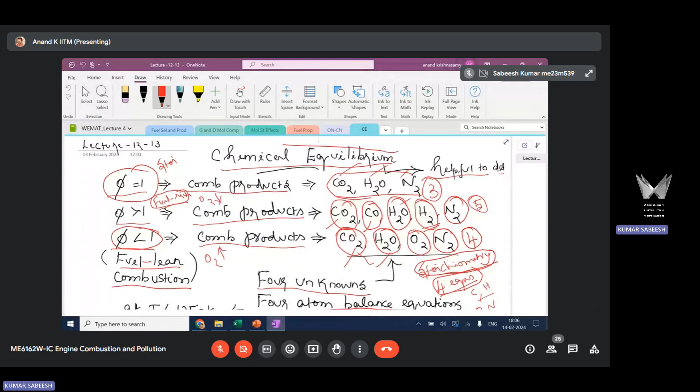So this is where I stop. This concept, chemical equilibrium, is primarily applied to determine the composition of the combustion product.

As I said, this combustion product composition is a strong function of two parameters: one is fuel-air equivalence ratio Phi, the other is temperature. We already discussed how this equivalence ratio affects the combustion product. We have considered three possible cases.

One is the stoichiometric case, where the major combustion products occur. I use the word 'major' because these are the major species even in actual IC engine combustion; there are several minor products which we are ignoring here. Actual product composition is much more complex and involves several other species, but generally these three are the major species. That's why with this simplified principle, we find only the major species information. Under stoichiometric condition, you have only three major species: CO2, H2O, and N2.

With phi greater than 1, that's fuel-rich condition. When you combust under fuel-rich condition, you will have 5 product species. Apart from CO2, H2O, and N2, CO and H2 will also be there. CO and H2 are the major products of incomplete combustion, because of oxygen deficiency, carbon burns to CO and hydrogen in the fuel comes out as it is. These are other species apart from the three major ones when you go with fuel-rich combustion.

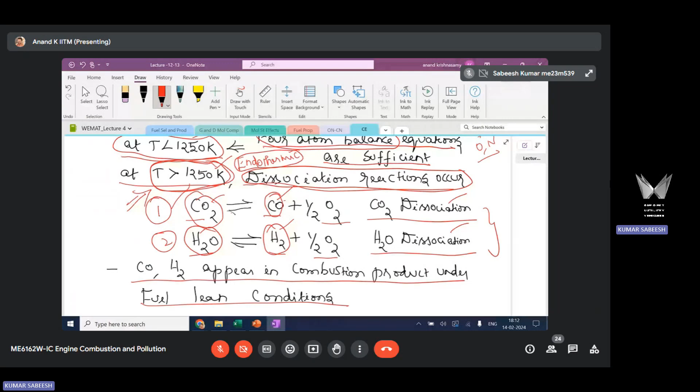These reactions happen at high temperature, well above 1250 Kelvin, where these molecules disintegrate and form additional species. So you will have CO and H2 present in the combustion product, although you are combusting under fuel lean condition.

You know what fuel lean is. When I say fuel lean condition, it's an oxygen rich condition. Even with more oxygen, you have CO and H2 present in the combustion product. We have already considered that CO and H2 are products of incomplete combustion, isn't it?

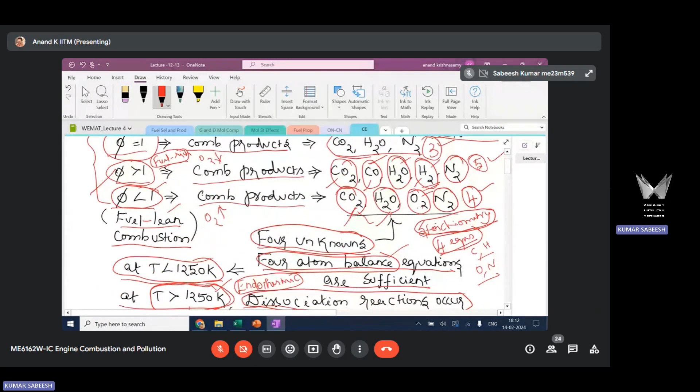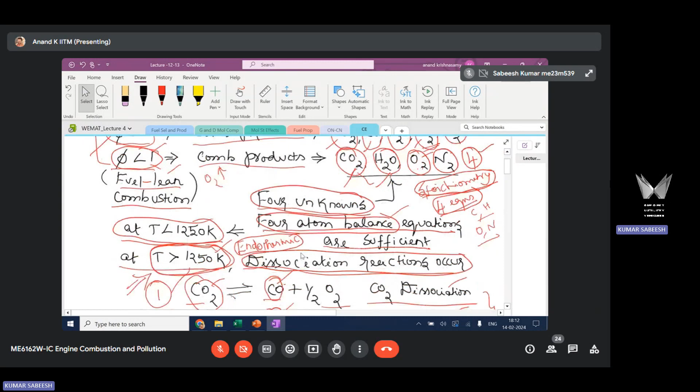Incomplete combustion happens when there is a deficiency of oxygen. With deficiency of oxygen, incomplete combustion happens and CO and H2 appear in the product. But now what is happening? Even with fuel lean or oxygen rich condition, I have this incomplete combustion product CO and H2 present along with the other major species.

This happens not because of oxygen deficiency, but because of dissociation reaction of stable species, which we categorize as endothermic reaction. Stable molecules disintegrate and form additional species. Since CO2 and H2O are present in major amount in the engine exhaust, they can very well form CO and H2 by undergoing dissociation reaction by absorbing thermal energy.

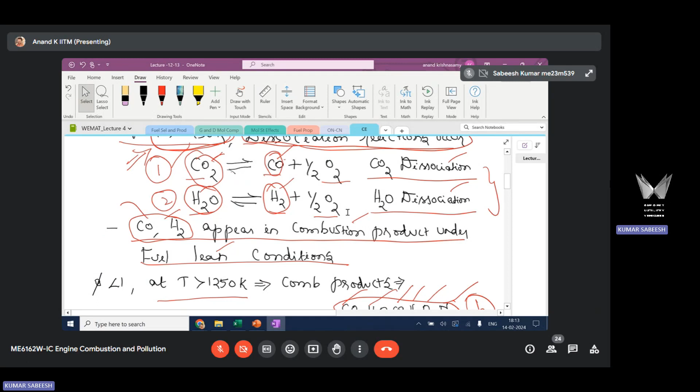The point to note here is when phi is less than 1, that is fuel lean or oxygen rich, at higher temperature T greater than 1250 Kelvin - this is a threshold value determined based on experiments - people observed that at this higher temperature, you are going to have dissociation reaction from major species present in the exhaust, which are CO2 and H2O.

Now, under this condition of phi and T, you could count the number of major species present in the engine exhaust: CO2, H2O, CO, H2, O2, and N2. You have 6 unknowns. Now I need to find the number of moles of all these 6 species present in major amount in the engine exhaust.

In order to get these 6 species, you cannot get the number of mole information only by stoichiometric principle, because we know that we can form at most only 4 equations from atom balance by applying stoichiometric principle. But how many unknowns do I have? I have 6 unknowns.

So stoichiometric principle alone is not sufficient to find the product composition under these conditions. Even with fuel lean, when temperatures are more, I am going to get more additional major species. So stoichiometric principle has a limitation. That is what is highlighted here. Now, how do I find the product composition?

To find the product composition, I need to apply chemical equilibrium concept. With chemical equilibrium concept, you can form additional equations, and by using those equations, apart from the 4 atom balance equations, you will be able to find the product composition. This is the usefulness of this chemical equilibrium concept.

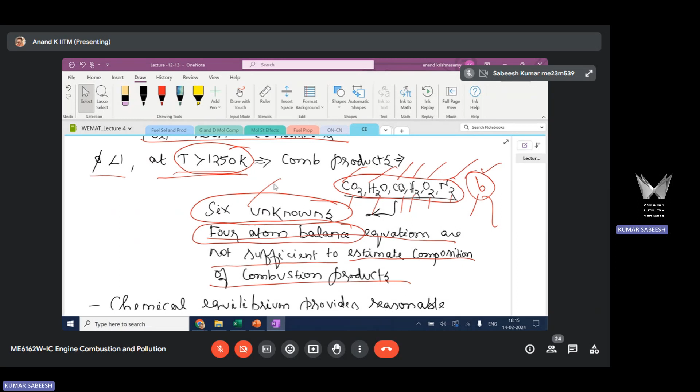Having understood the background information about how useful this concept is, now we are delving deep and we are going to discuss what this chemical equilibrium is, and how I can form additional equations by applying this concept.

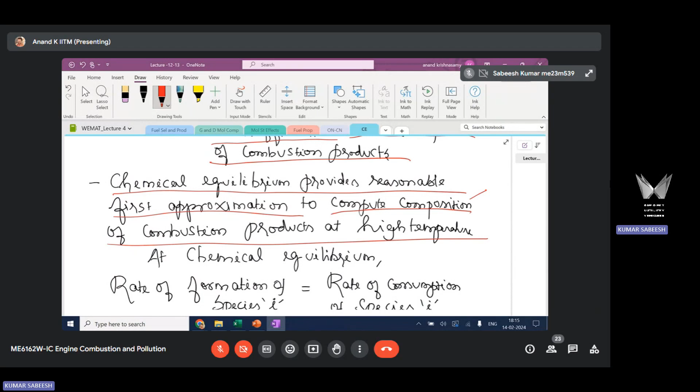Chemical equilibrium provides a reasonable first approximation to compute composition of combustion products at high temperature. When temperatures are high, dissociation reactions are going to happen, and more species are going to form in the combustion product. So we need to apply this concept - there is no other way to find the product composition.

Now what is this chemical equilibrium? We know that when a chemically reacting system is under chemical equilibrium, the rate of formation of any species, say species i, is equal to the rate of consumption of that same species. There is a formation, there is a consumption, and at the equilibrium condition, the rate of formation equals the rate of consumption. So what it means is there is no net change of species i.

Under equilibrium condition, there is no net change of species i, because the rate of formation of that species is equal to the rate of consumption of that species. So this is a qualitative or physical meaning of what an equilibrium condition is.

Now this is only qualitative understanding. This is not enough. We need to give some equations and establish the conditions for chemical equilibrium so that we can get the product composition. That is our focus.

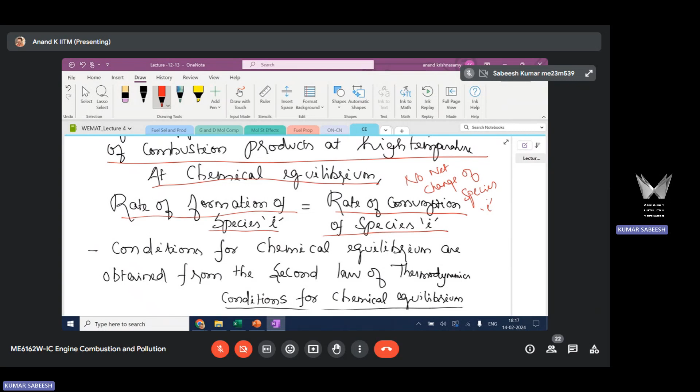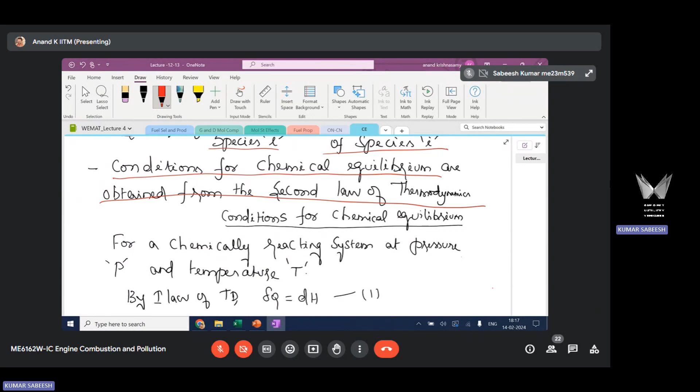Now moving ahead, we are going to discuss the conditions for chemical equilibrium. To establish these conditions, we are going to apply the first and second law of thermodynamics. This is where the principles of thermodynamics come into the picture. We are going to see how we can establish conditions for chemical equilibrium in order to get a quantitative estimate of product composition, and from that we will see how we can form additional equations.

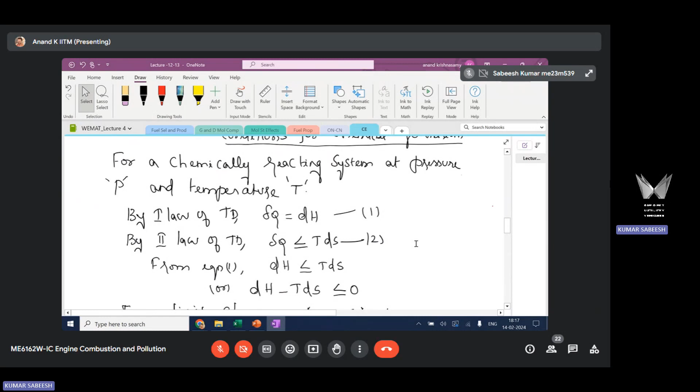So for applying the thermodynamic principle, it's a steady state approximation. We will consider a steady state and apply this principle so as to arrive at the condition. This is what we are doing here.

Now we are considering a chemically reacting system. When I say system, it's a fixed mass of matter. When I say chemically reacting system, the fixed mass of matter includes fuel and air, which can react chemically, which can undergo chemical reaction. This is what I mean by a chemically reacting system.

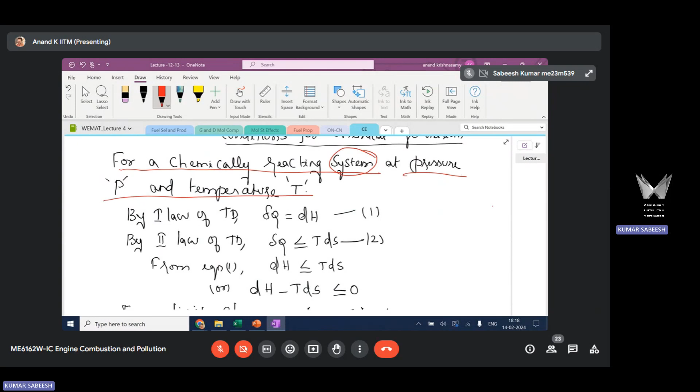Now let us consider a chemically reacting system at a pressure P and temperature T, because I'm going to apply the thermodynamic principle, considering the steady state approximation. With the application of the first law of thermodynamics, since pressure remains at P, I can write del Q is equal to dH. This is from the first law, so change in heat interaction is given by change in enthalpy when the pressure remains constant.

Now, the first law of thermodynamics just relates heat and work, but it doesn't tell you how much heat can be converted to work. This is where the second law of thermodynamics comes into the picture. It provides an estimate of how much heat can be converted into useful work, and how much energy is unavailable. This unavailable form of energy is defined through the term entropy.

So by the second law of thermodynamics, you can write del Q less than or equal to TdS. This is from the change in entropy equation: dS can be greater than or equal to del Q by T. dS will be equal to del Q by T if the process is reversible, ideal. When the process is irreversible, dS will be greater than del Q by T. That's why it is written as del Q less than or equal to TdS. dS is the change in entropy, which provides an estimate of the unavailable form of energy, that is, energy not available for conversion to work. So this is according to the second law.

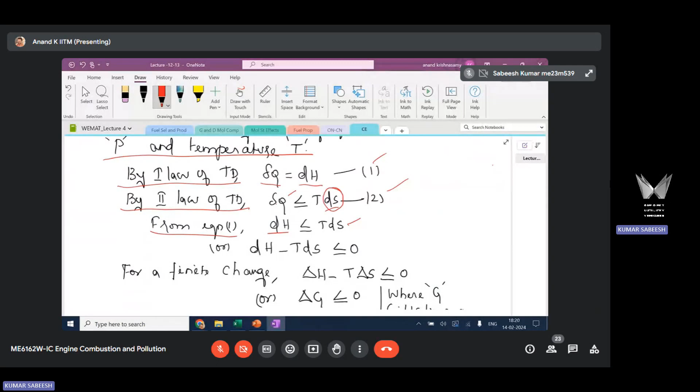Now when you combine the first and second law, you can write this equation. Here del Q is replaced with dH, so you can write it as dH less than or equal to TdS. If you rearrange this equation, you can write it as dH minus TdS less than or equal to 0, and this is for a small change. You see the notations here: I have used D for H and del for Q.

Can anyone tell me why the notations are different for different parameters? What could be the reason? This is according to the standard representation that we follow in thermodynamics. Why do we use D for H and del for Q? A student suggests: enthalpy change is small in that sense, a progressive change, and del Q is basically the total amount of energy changed in that way, so probably that's why delta is used.

No, my question is about this smaller change. We use the word infinitesimal change, which is very small, that's why we use D or del. But my question is, why do we use del for Q and D for H? A student responds: Sir, Q is quasi-static, so it happens that way, that's the reason why we use del.

Quasi-static, no, sorry. Because H is a function of P into dV, sir, in that way. Have you come across point function, path function?

Heard, sir, but forgot. Sorry.

Q is actually a path function. Q and W are path functions - they are non-property. H, enthalpy, is a property. Properties are point functions; they don't depend on the path followed by a process. Q and W depend on the path followed in a process, so they are called path functions. Whereas properties like H, enthalpy, are called point functions because they are independent of the path followed.

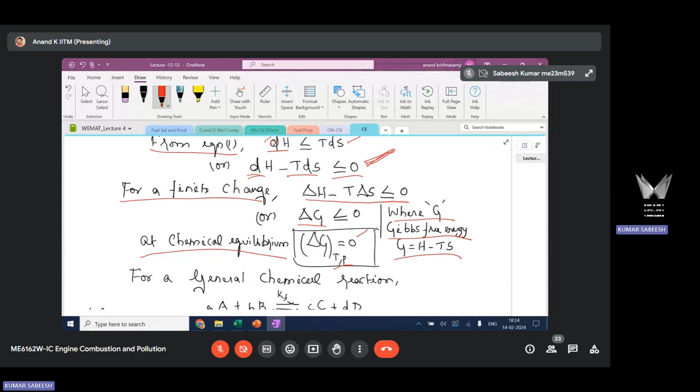So delta G can be less than or equal to 0; at chemical equilibrium, delta G will be equal to 0. This is the condition for chemical equilibrium that we get based on the first and second law of thermodynamics. Now, moving ahead, we are going to consider a chemical reaction and see how this equation can be expanded.

So here we are considering a general chemical reaction, small a capital A plus small b capital B. These two are reactant species. Capital A is one of the species, capital B is another species. The small a and small b stand for stoichiometric coefficients of species A and species B. I will give more details about this in the next topic, which is on chemical kinetics.

Now here our focus is to see how we can apply this chemical equilibrium concept to form additional equations to get the product composition. So for a general chemical reaction involving these four species, A, B, C, and D - these are the species involved in the chemical reaction - and small a, b, c, d are the stoichiometric coefficients of these four species.

The reaction proceeds in a forward direction with the rate constant Kf. I will talk about this rate constant in more detail in the next topic on chemical kinetics. The reaction also proceeds in a reverse direction with the rate constant Kb. So this reaction is proceeding in forward as well as backward direction, and the associated reaction rates are indicated as Kf and Kb. Now I want to find the net rate of reaction progress.

The net rate of reaction progress is given by Q dot R equals Kf multiplied by the concentration of species A and B. The square bracket symbol stands for concentration of a particular species. I will give more details on this in the second topic on chemical kinetics. So Kf, concentration of A raised to the power a, B raised to the power small b.

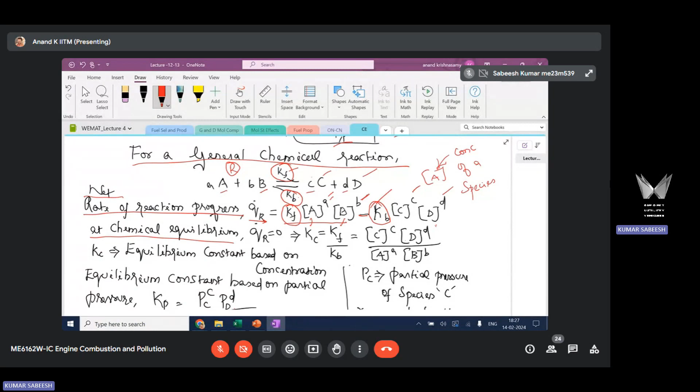Under chemical equilibrium condition, the rate at which the reaction proceeds in the forward direction will be equal to the rate at which it proceeds in the reverse direction. So this and this will be the same, and you can say that Q dot R is 0 at chemical equilibrium condition.

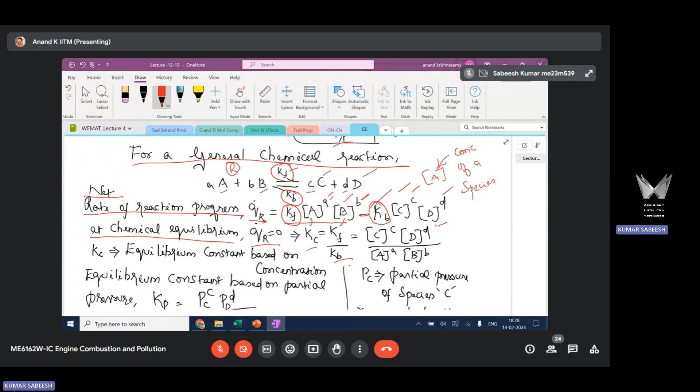So you can write the equation Kf by Kb equals concentration of C and D raised to the power of their stoichiometric coefficients in the numerator, and concentration of A and B raised to the power of their stoichiometric coefficients in the denominator. This Kf by Kb is replaced using another constant, K with subscript C. This constant Kc is called the equilibrium constant based on concentration, since this equation is written based on the concentration of the four species involved in the chemical reaction.

Another useful, equivalent form of this is Kc replaced with Kp. Here the concentrations are replaced with P, partial pressure, with subscript C raised to the power of its stoichiometric coefficient. Similarly, you have partial pressure of other species raised to the power of their stoichiometric coefficients. P stands for partial pressure, so PC is the partial pressure of species C. These two are equivalent forms of the same equation, one based on concentration, the other based on partial pressure.

Why does this equation carry significance? Because you can expand this partial pressure in terms of mole fraction. We want to form an additional equation to get information about the moles of major species in the combustion product. That's why we have written an equivalent form of the Kc equation in terms of partial pressure, because partial pressure can be expressed in terms of mole fraction.

Can anyone tell me how I have obtained this equation from the previous one? The previous equation is written in terms of partial pressure. The next equation, equation 3, is written in terms of mole fraction of the same species. So basically, sir, partial pressure is concentration into total pressure. Do you mean concentration or mole fraction? Mole fraction. So can I write a general form as Pi, where i stands for any species, such that Pi equals Xi into P?

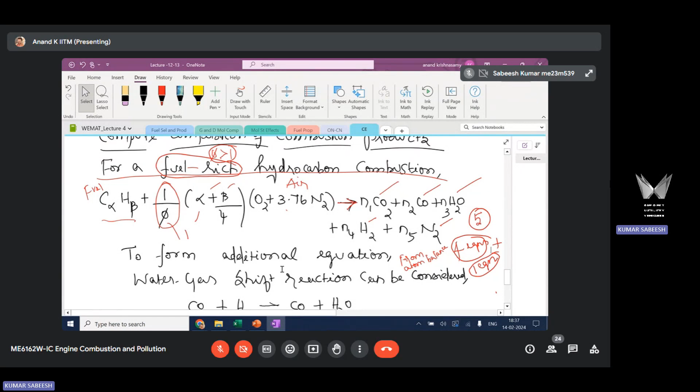So you will have 4 plus 1, that is sufficient to get this 5 species information. That is what we are going to see here by considering a fuel rich hydrocarbon combustion that leads to 5 major species, N1 to N5. So I can form 4 equations. Now I need to form an additional equation by applying chemical equilibrium concept.

To apply chemical equilibrium concept, what you should do is consider an additional chemical reaction involving any of these species. You have 5 species in the product. These species, as I have already informed you, will also participate in other chemical reactions. So the chemical reaction I have considered here is called the water gas shift reaction. This is one of the prominent reactions that happens in IC engine combustion.

Water gas shift reaction: CO2 plus H2 forms CO and H2O. It happens in forward as well as reverse direction. This reaction involves 4 of the species we have considered here: CO2, H2, CO, and H2O. This is one of the reactions that happens in IC engine combustion at high temperature when you have a fuel rich combustion happening at high temperature.

This is an additional reaction that can happen. Now I have written this additional reaction. Now I am going to apply the chemical equilibrium concept and form one more additional equation. This choice of chemical reaction is your choice actually, but you have to carefully choose in such a way that it involves most of the species present in the general equation you have written. So I have chosen this equation because 4 of the species participating in the general equation are involved in the water gas shift reaction.

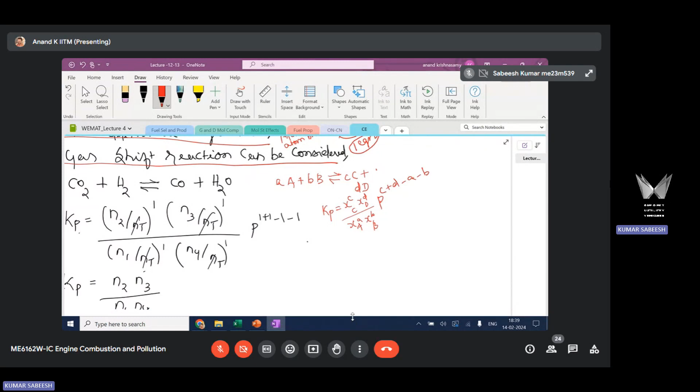What you have to do is just compare this generic equation with the specific equation you have considered here: generic and specific. This is a general chemical reaction and its associated Kp equation. This is the specific chemical reaction you have considered now, and this will be the associated Kp equation.

So Kp can be written using Xc raised to the power C. This is species A, this is species B, species C, this is species D. Now what is the stoichiometric coefficient here in this chemical reaction? Small a, b, c and d? They are all 1. So you have 1 here, 1 here, 1 here and 1 here.

Now you compare these two forms. I am writing the equation for Kp: that will be Xc. What is Xc? Mole fraction of C. Mole fraction of C can be written as number of moles of C divided by total moles.

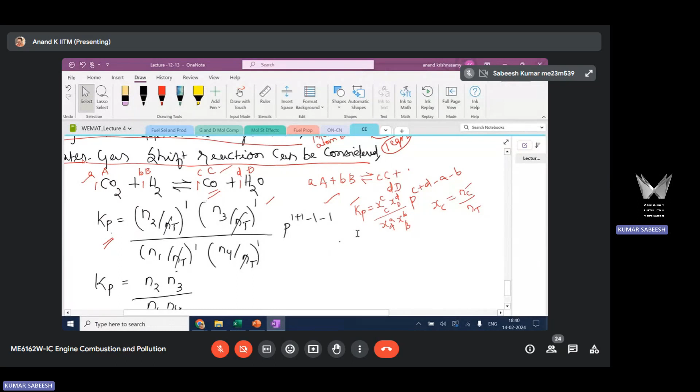Now, how many moles? What is species C here? This is species C, right? CO is species C. How many moles of CO is present in the combustion system? You have to go back to the original equation. N2 moles of CO is present. Stoichiometric coefficient is 1, but in the combustion system, you have N2 moles of CO available.

So the equation will be N2 by total moles raised to the power small c, where small c is the stoichiometric coefficient, which is 1. That is multiplied by Xd. What is Xd? Mole fraction of D. What is species D? H2O. How many moles of H2O are present in the combustion system?

N3 moles. So this equation will be N3 by total mole raised to the power small d, which is the stoichiometric coefficient, that is 1 here for H2O, divided by Xa. What is Xa? Mole fraction of species A. What is species A here? CO2.

How many moles of CO2 are present in the combustion system? N1 moles. So N1 by total mole raised to the power small a, stoichiometric coefficient, which is 1 here, multiplied by XB, mole fraction of B. What is species B here? H2. How many moles of H2 are present?

N4. So you will be having N4 by NT raised to the power small b. Small b is 1. So this is what the Kp equation will be: N2 by Nt raised to the power 1, N3 by Nt raised to the power 1, N1 by Nt raised to the power 1, N4 by Nt raised to the power 1, multiplied by total pressure raised to the power small c plus d minus small a minus small b.

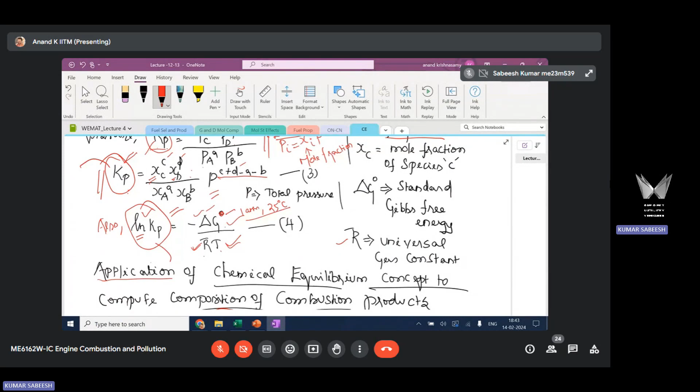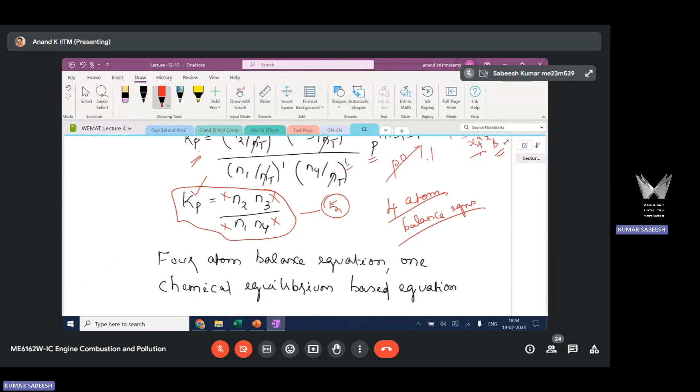So this is known to you and you have these unknowns. This is equation number 5. You already have 4 atom balance equations from stoichiometry, by balancing the atoms on the reactants and product side. You have one more equation now based on the consideration of chemical equilibrium concept. With these 5 equations, you will be able to get the 5 unknowns. So you have 4 atom balance equations and 1 chemical equilibrium based equation. Solving this...

You will be able to get N1 to N5, which is nothing but product composition. So you are obtaining product composition with more number of species. Here I have considered the simplest case, wherein I have the 4 plus 1 case. Similarly, you can write additional chemical reactions and form additional equations involving Kp, and thereby you will be able to get the product composition. So whenever there are more than 4 species in the combustion product, you have to apply the chemical equilibrium concept and form additional equations using those.

By solving those equations, you will be able to get the information about the product composition. So this is the usefulness of this concept of chemical equilibrium, wherein we can get information about the product composition in a complex system where the number of species is more than what simple stoichiometric principle can provide. Clear?

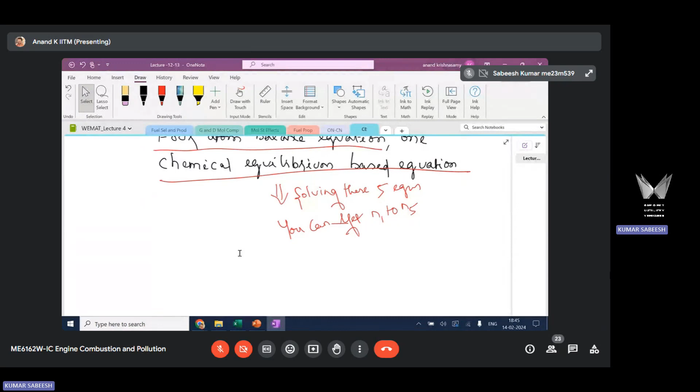Sir, one query, can I ask please? Basically, the generic equation we have given for fuel-rich hydrocarbon combustion is C alpha H beta plus 1 upon phi, and like that. Now we have considered a secondary equation, which is the water gas shift equation. Now while doing the equilibrium balance for this equation, sir, also we have considered the molar mass, molar content, as 1 coefficient, like that, but nT is taken from the above equation. I just got a little confused in this. Why does the mole fraction of the first equation have to be considered in this equation?

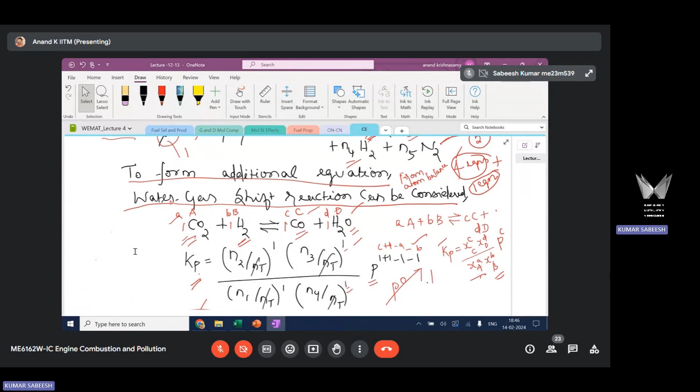So I'll give more detail about this. It's a good question. I'll give more details about this in the next topic on chemical kinetics. So this is a generic equation, right? And the second equation we have written is called an elementary reaction. There is something called a global chemical reaction and an elementary reaction. Elementary reaction will always proceed with stoichiometric coefficient. This is an elementary reaction.

And what you have written in the beginning is a general reaction, which is also called a global reaction. So you have a global reaction and these unknowns N1, N2 — I have used some generic notation N1, N2, N3, N4, N5 because they are unknowns. And these species that we are considering in the generic equation are undergoing additional reactions. Those additional reactions are categorized as elementary chemical reactions. Elementary chemical reactions proceed only with stoichiometric coefficients.

I have so many moles of CO2, CO, H2 and H2O, and these species are participating in other reactions categorized as elementary reactions only with stoichiometric coefficient. Do you understand? I have these many moles of these 4 species available in the combustion system, and these species are participating in some other reaction categorized as elementary reaction, but that reaction will proceed only with stoichiometric coefficient.

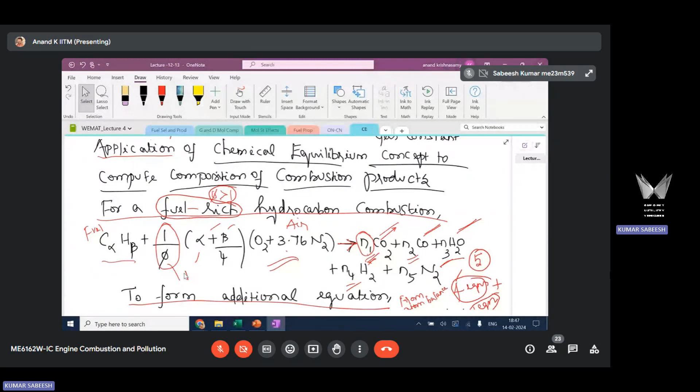Thank you, sir. Thank you so much. Yeah, okay. Thank you, sir. Fine. Any other doubt?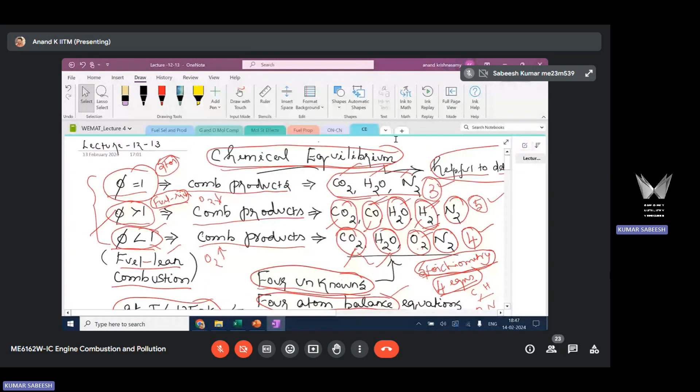So with this, I conclude this concept.

Sir, in that case, for NT equation we have written NT is N1 plus N2 plus N3 plus N4 plus N5, right? No, NT here I am considering in the elementary reaction. Okay sir, elementary reaction, chemical reaction.

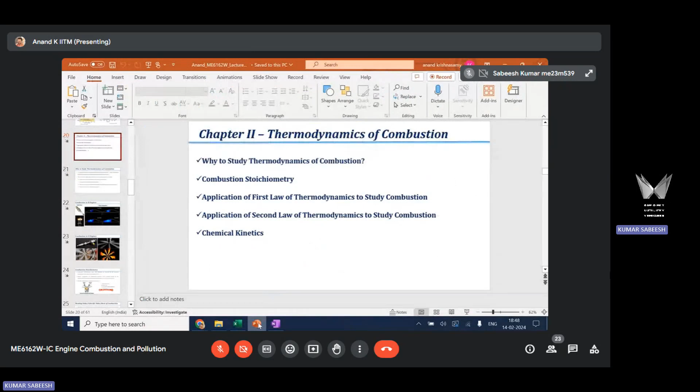I have some total moles of those species categorized as N1, N2, N3, and whatever species I am considering in the general or global equation, the chemical reaction is undergoing something else categorized as elementary. Elementary reaction will always proceed with stoichiometric coefficient. Understood, sir. Thank you, sir.

Like I started the discussion with the dissociation reaction, right? Dissociation reactions are elementary reactions. CO2 forms CO and O2, you can also consider those reactions. The reason I considered this particular chemical reaction is it involves 4 of the unknown species in the product. That's why I chose the water gas shift reaction.

Okay. Sir, so in case of phi equal to 1, where the number of products is 3, whereas the atom balance equations will be 4, so will there be consistency of those?

It's not a problem, you can form more than what is required. The purpose here is to get the unknown. It doesn't matter if you have more equations, you'll still be able to get the unknown, right? The objective here is to get the unknown, that's it.

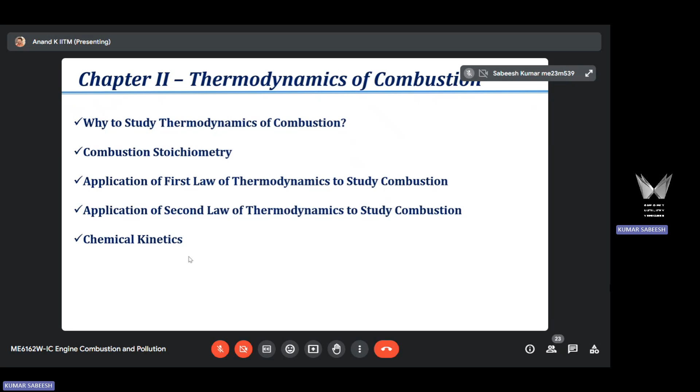Sir, you mentioned about controlling the products, like emissions. So when we talk about emission control, in the sense of ignition control, right sir? Like we have to control the ignition.

Emission control includes in-cylinder emission control and after-treatment control. In-cylinder control means reducing the pollutant level within the cylinder itself. Until you know when the pollutants are forming and at what rate, you cannot devise a suitable method to reduce pollutant formation inside the cylinder.

So ultimately we control the ignition in such a way that pollutants are formed suitably. Yes, that is one of the external controls you can do. You control the timing of combustion, the start of combustion, which helps phase it appropriately and helps reduce or mitigate the formation rate of pollutants. So you have to time it properly—time the thermal energy release properly—so that pollutant formation levels are reduced.

Suppose if you retard fuel injection timing, the NOx formation is going to reduce. I will talk more about it in the second module. But when we delay the start of combustion, the combustion temperatures drop. With a drop in combustion temperature, you can reduce the NOx level, oxides of nitrogen, because that is highly sensitive to temperature.